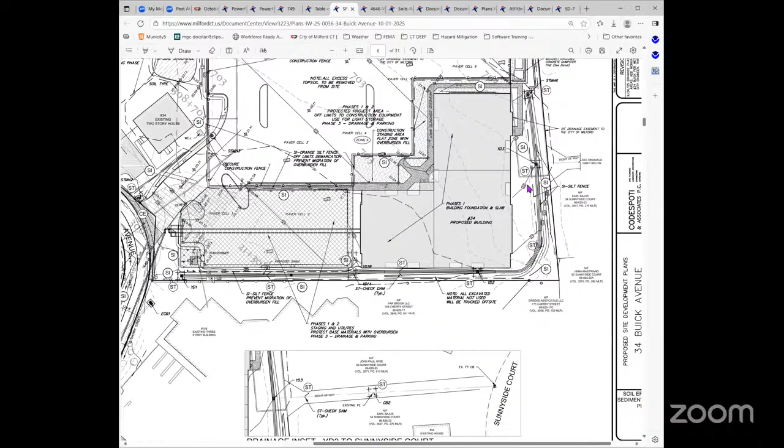And the last item that I'll go over and highlight is the perimeter drainage system for the proposed project. Again, as was mentioned at the previous meeting, there's a watershed area that comes down from Sunnyside Court, as well as some of the adjacent residential properties, which right now discharges through an existing pipe that's located off-site of our property, and that basically all flows onto our property via sheet flow.

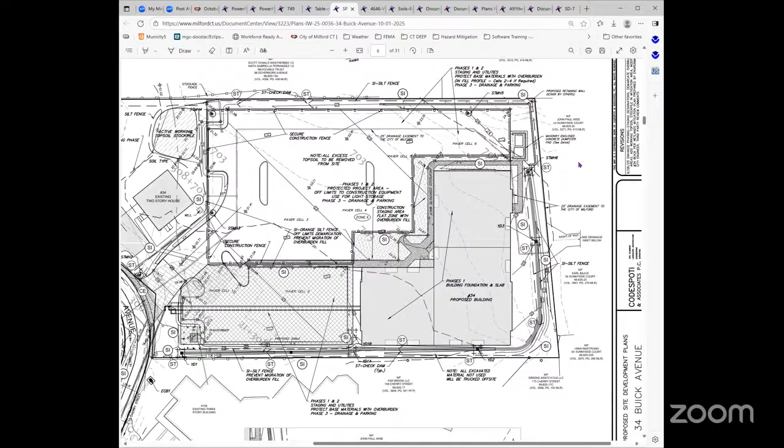And what's on the current set of plans is that piping be extended up into the right-of-way, with a connection being made through a new catch basin, and then extended down to our yard drain 3 on our property, at which point it'll be carried around the perimeter of the property, so that it ultimately gets discharged out to the head wall on Stubby Plain Brook over by the twin 36-inch culverts. Some of the reviewers' comments dealt with the discharge coming out of that piping system, and also the analysis and the sizing of the pipe, which we provided that documentation for, per the reviewers' comments.

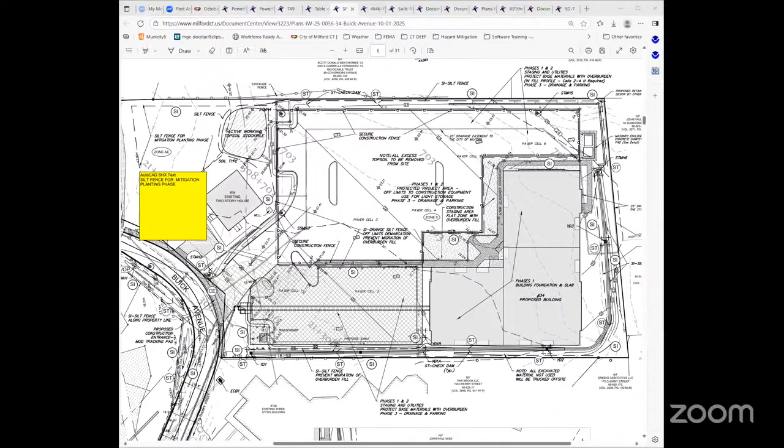So we provided the sizing of the pipes as well as the discharge coming out of the pipe at the head wall. And that analysis indicated that the exit velocities coming out of our pipe will be less than 2.5 feet per second for a 10-year discharge through that system. Based upon the 2.5 feet per second, those would be considered non-erosive velocities with respect to the existing stream bed channel. By way of reference, the stream bed channel is comprised of an extremely compact fine gravel substrate populated with cobbles. With this type of surface, the maximum non-erosive velocity is estimated to be approximately 5.5 feet per second. So our discharge will be well below that.

And also by way of reference, the existing twin 36-inch culverts have a discharge of approximately 160 cubic feet per second, as reported by FEMA for a 10-year flood event. And based upon visual observation, I'm sure the commission members can remember from the site walk, there are no visible signs of erosion or scour taking place on the downhill side of the outlet. So it's my opinion that the proposed outlet through the head wall will not create any negative impacts to the water course in that particular location. So that pretty much sums it up.

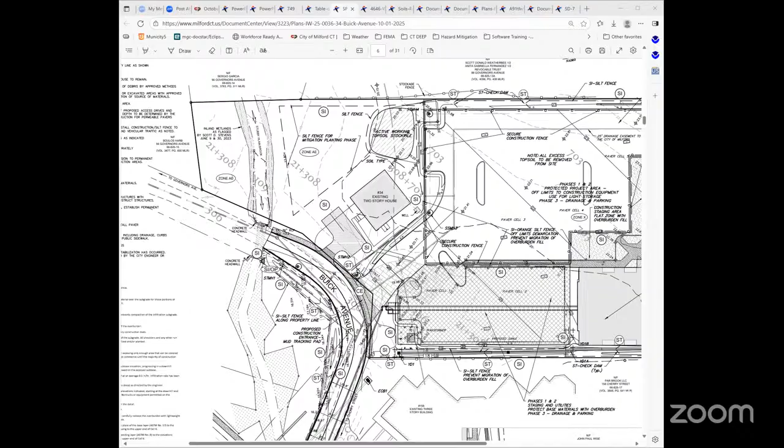So unless the commission has any questions, I'd like to turn it over to Mr. Jeff Gordon to further discuss the modifications to the soil erosion control plan in the biofiltration areas, and then that'll be followed by Matt Popp and Jen Beno to provide their environmental assessments for the biofiltration area. Thanks, Mr. Weiwei. Go ahead, Mr. Gordon. Thank you very much. Again, my name is Jeff Gordon. I'm a principal with Codespoti and Associates, working with Bob Weiwei and the rest of our design team on site planning and the S&E measures for this particular development.

I happen to be one of the charter members of the International Erosion Control Association and have taken post-graduate work in bioengineering for S&E measures. And this is what really the 2024 updated S&E guidelines for the state of Connecticut is advising us to do. They're dovetailing this with the new stormwater management manual from 2024.

And previously there were hopes that we would integrate low impact development features into design. And now the guidance is that it really is a must do. We don't want to develop with a one type fits all type of development, but they want LID measures to be the primary focus in planning and design. And again, it ties in with the stormwater management regulations that were updated with more current data. And that translates into some of the features that we have to look at.

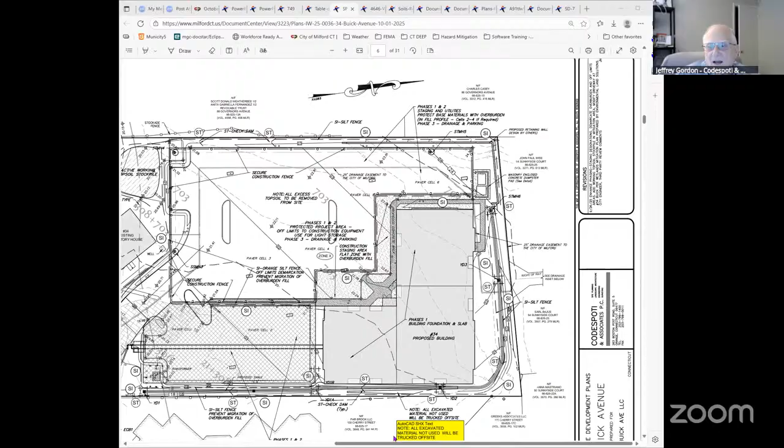But we have a number of phases that talk about the access to the site, the demolition, where we're going to be placing and how we're going to be placing overburden to protect against compaction, areas that are going to be primary access areas for heavy equipment. And then we have that vacant area above there, Mary Rose, that's going to be for very, very light access, light storage. And then right in front of the building there, we have about a 15 to 20 foot, go up a little bit more, and in the crook of the elbow, right there and up, areas for access for the high-low equipment and some construction equipment as well. So we have those things brought out in the phasing plan, which is on the plan.

And then we also have a specific sequence of construction for the permeable pavers themselves, how those areas are going to be identified and protected, and the sequence in which the cells are going to be constructed. The north finger of that parking area there near the dumpster, that area is actually in a cut situation. So the overburden is not really required in that area.

But as we go to the south, that's where we're starting to be into the area where we're going to certainly have special protection of the soils. The access to the site comes off of Buck Avenue, right in the crook of the elbow there, and then kind of like a hard right into that area. And that area is going to be the area where most heavy equipment will access the site.

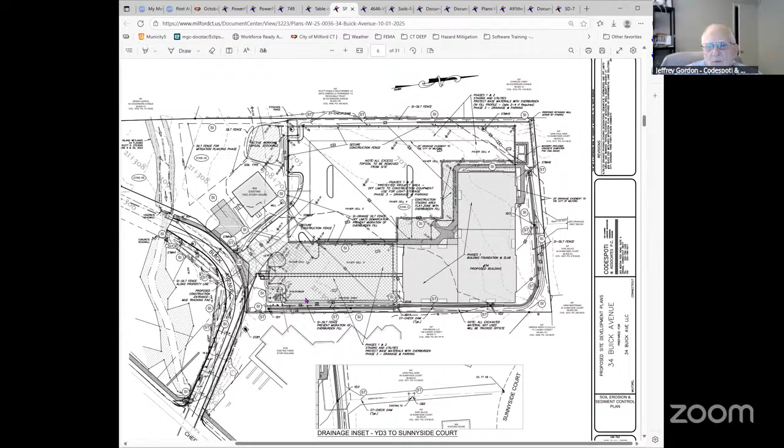Now, if we have an opportunity, I don't know, Mary Rose, if you can bring up the biofiltration plan. Can you tell me which sheet that's on, Jeff? Oh boy, it was added late, or you can blow up that one over there. Okay. Mary Rose, it should be the last sheet. It's SP10. Okay. Thank you.

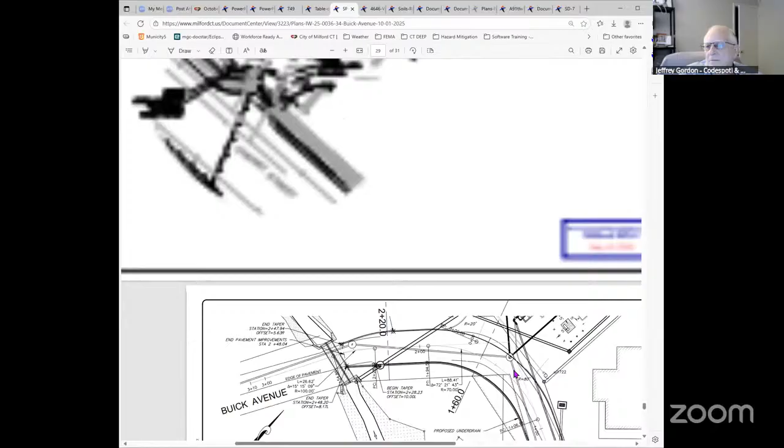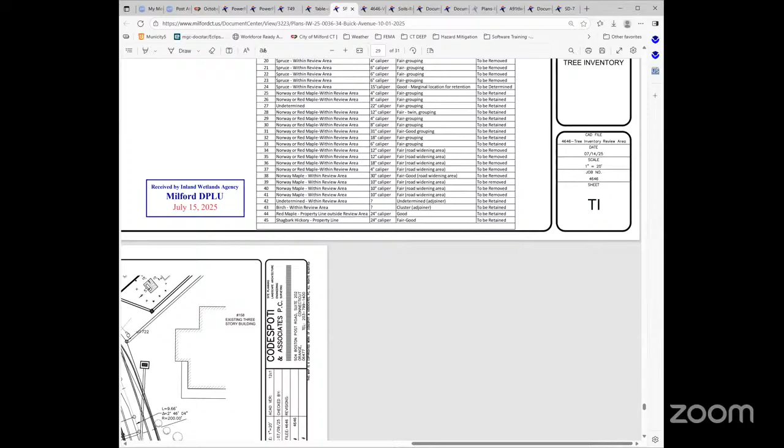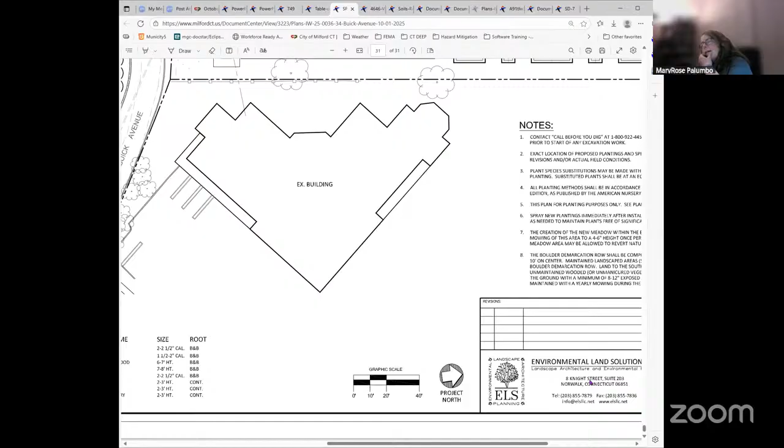What happens? Oops. That's the tree inventory. Oh, tree inventory. What is this? Oh my gosh. Okay. Anyway, so it's about. Sarah, I'm going to mute you. That could be, am I close? Well, that's Matt's plan. He'll be speaking to that. Keep going. Is that the last one in your group? That's the last sheet in the set. Okay, well, why don't you go over just to the landscaping plan and we'll just highlight that one area. Keep going up.

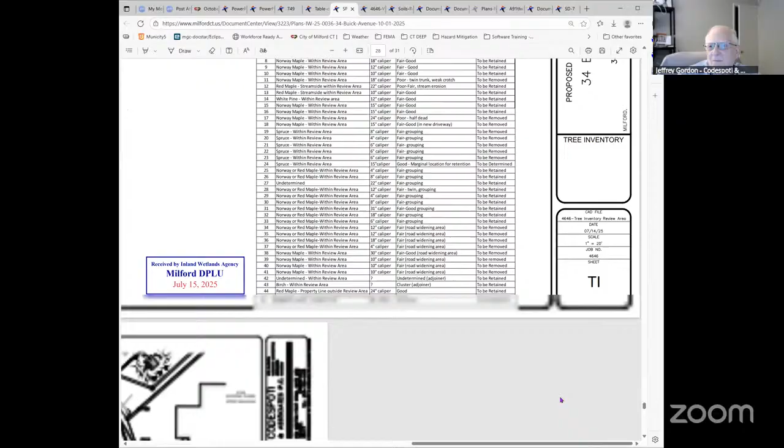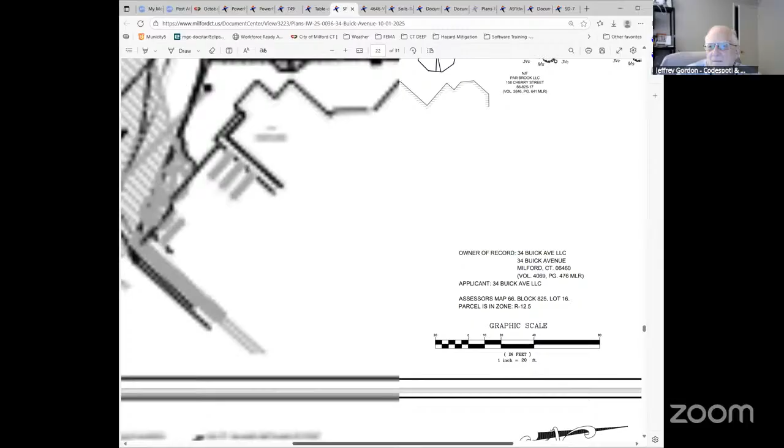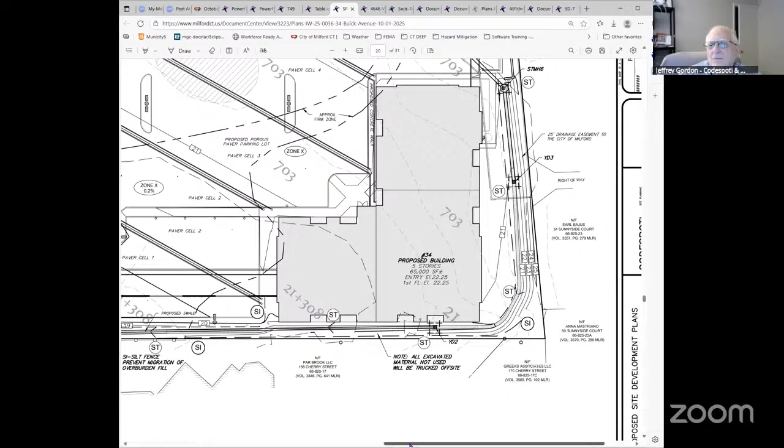Okay. Well, that's good. It's pretty. I'm not sure that has that in this particular. I know that it has the level of detail you want. No, it was the regular planting plan. Let's go back up with another sheet. There you go. This will be good. Well, maybe not. I thought I saw it earlier. No? It's funny, you had it up there before. Mary Rose, I believe it's on page 13. Thank you. Oh, too far down. That's my bad. Oh, well, apparently Zoom did not like that. Hold on a second. You fell off the earth. Got a very angry little guy.

Well, just the comment on the plant materials there, we have introduced the iris, the ferns, spice bush, black gum, arrowwood, all native plant materials in order to create a naturalized depressed area, as was highlighted in the 2024 S&E plan. So we've basically done many of the different components. We've added them together: biofiltration, permeable pavement, vegetated swales. There you go. That's great.

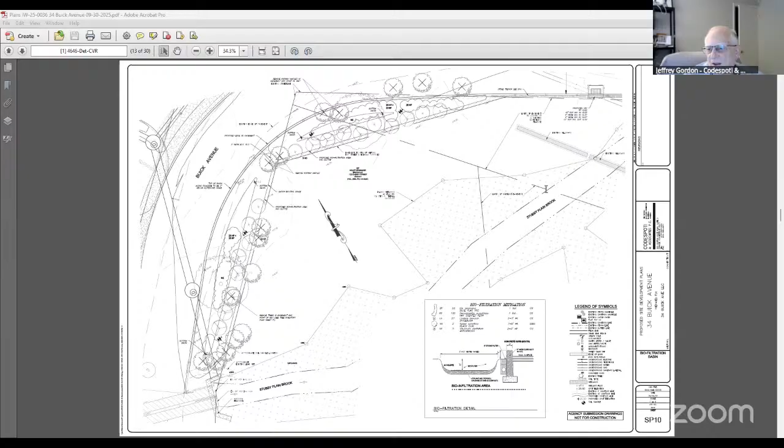Yeah. So this is the area that is south of the slotted curbs that Bob was talking about, that Mr. Podlisky had requested. And these are little basins there that one can leak into the other and can be used to form a treatment. And we have the detail there in the lower right, that biofiltration detail with the plantings. And you can see there's the slotted drain, drops off. There's an under drain behind that curb. And then we have about a 12-inch deep biofilter area that has a special plant medium that these shrubs and grasses will be planted in.

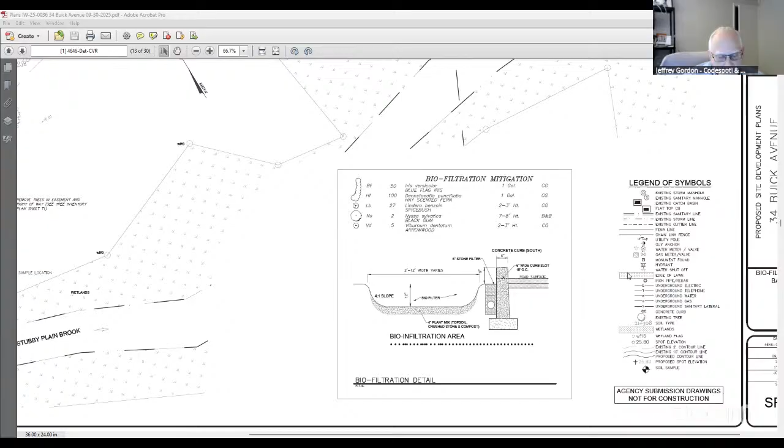So that would really cover the area that I was going to talk about, but I guess Jenn Beno would next comment a little bit more about the impacts on wetlands and biofiltration. Thank you, Mr. Gordon. Go ahead, Ms. Beno. Good evening. For the record, I'm Jenn Beno, biologist, wetland scientist with Soil Science and Environmental Services. Our office is in Rocky Hill, Connecticut, and I've been with the firm since 1994. And I'm co-owner of the company.

So I'm just going to give you a little information on that bioswale area that they're proposing south of Buck Avenue. So currently there are no stormwater runoff management or treatment measures on Buck Avenue. And water just flows untreated into Stubby Plain Brook. And you could see it was evident on one of our recent inspections last week. We were out there, and it's like a wash area, where you could see stormwater just ran off the road and into Stubby Plain Brook.

So the applicant is proposing a small bioswale, and that's south of the road. And so they would create a swale in that area, and then they would provide a good growing medium, and then provide native plantings. And there are actually a couple of benefits. First, you get the stormwater treatment before it enters Stubby Plain Brook, and you're also removing invasive species. So there are several Norway maples in that area that will be removed.

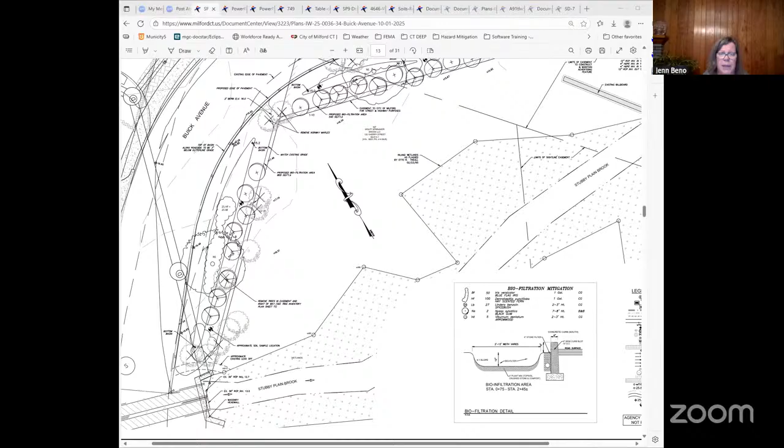So in our opinion, the bioswale, though it might look really small, we think that something is better than nothing in that area, and some sort of stormwater treatment is necessary for that Buck Avenue runoff. I think that's pretty much all I had to say on that. So I'll turn it over to Matt Popp, and he can describe the plantings and add any other information.

Good evening, I'm Matthew Popp, landscape architect, professional wetland scientist with Environmental Land Solutions. I prepared one of the mitigation plans and reviewed the project for wetland impacts. I visited the site on August 26th, September 15th, and September 23rd. Maybe we could just keep this drawing up for a second or two. You can see the wetland area borders where Stubby Plain Brook flows through the wetland.

The wetland consists of mainly a lot of fill, a lot of Norway maples. There's multiflora rose, garlic mustard, and those are three non-native invasive species. The brook itself is channelized. There's boulders on the bank that were placed years ago. The bottom of the watercourse consists of stone, chunks of asphalt, concrete, bricks, and masonry blocks. It's extremely compact. I walked through some of the sections of the brook.

So at the last meeting, I think Tom Ryder noted that this type of watercourse is flashy, meaning that after a rain event, water flows through the channel, but then immediately after the rain event, the flow stops, and that's what I found also. Flashy watercourses typically mean an urban setting where water flows on hardscape areas, flows quickly down into the watercourse and off downstream. Flashy watercourses also usually have little green space above it, little infiltration. So there's usually no or very little treatment of runoff.

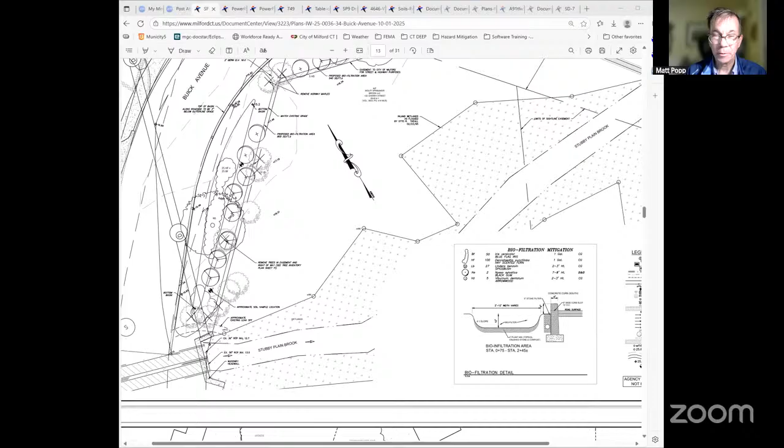So there was no water flowing on August 26th and September 15th. There was a little bit flowing on September 23rd. It was completely dry on those first two visits. There was some talk about benthic organisms within the watercourse at the last meeting. Typically in flashy watercourses that dry out quickly, these organisms are few. They have to be very adaptable and tolerant of harsh conditions, the drying and flooding conditions.

So I went there with a snake hook and turned over a bunch of the rocks within the watercourse, and I found just what I expected, very few organisms. I found about 2 earthworms, a couple of centipedes, and about 20 pill bugs. I looked for a while too. But the bottom is, again, extremely compact. Some areas almost felt like concrete, especially in the section that we're looking at, just below the head wall there.

Regarding the placement of the 24-inch drainage pipe into the head wall, in my opinion, that won't have a significant adverse impact to the wetland or to the watercourse. Again, that section of the brook is extremely compact. When water flows out of that, there'll be a lot of water flowing through that channel to begin with.

So as Bob noted, I'd just like to point out one thing about the drainage system. He went into quite a bit of detail on the permeable pavers. That is 90 feet away from the wetland at its closest point and 110 feet from the watercourse. So that's a significant distance. Just for comparison, the parking lot just to the north of the site is about 40 feet from the wetland.

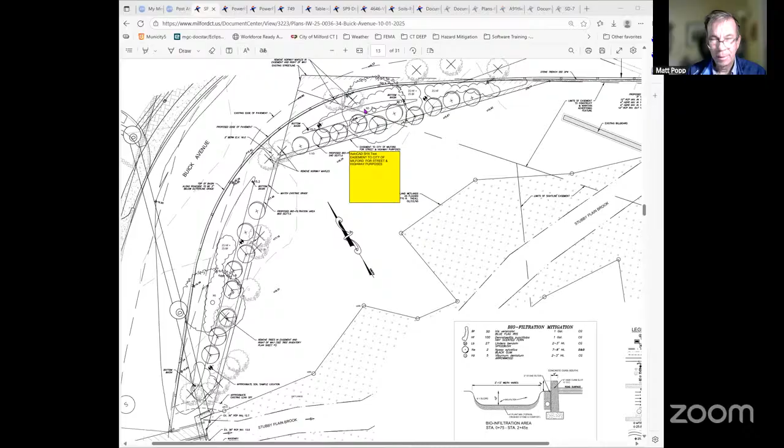But maybe we can go to my mitigation plan. So you can see the distance. We have about 90 feet from the edge of our pavement, from the permeable pavers right there, to the wetland at its closest point, and about 110 feet to the watercourse. As Bob noted, the permeable pavers will infiltrate stormwater runoff. It traps a lot of sediments that collect the pollutants and recharges groundwater, which I think is a good thing here. It makes the flow in Stubby Plain Brook longer, so it's less flashy, which is something that you strive for. So to me, there would be no adverse impact on water quality from the site, permeable pavers or drainage system.

Jeff Gordon went over the proposed biofilter, which is just on the south side of Buck Ave. We shifted Buck Ave a little bit to the north so we can get that in. There'll be a few Norway maples, and I think there might be one red maple that come out. We are replanting that with additional shade trees, mainly the black gum, and then putting in iris and ferns, dry tolerant plants. So that will help cleanse the water from Buck Ave.

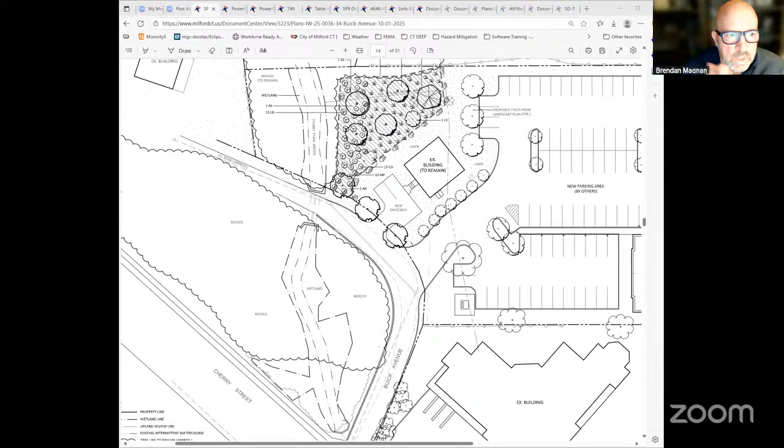Thank you, Mr. Popp. You're welcome. We may have questions. We're going to proceed with opening up for public testimony. And before we transition to that, just as a reminder, this is a continuation of the public hearing. No need to repeat what you've already stated on the record. That's already part of our deliberation. Please, if you have something to address, speak to only new information that's been given.

And please also consider the fact that we have our third-party expert that will be presenting to the agency after the public hearing. And after that, the agency will decide whether the information that we have before us is complete, and if so, whether or not we will continue the public hearing or otherwise. So, Mary Rose, did you have a list of folks that previously identified themselves as wishing to speak in opposition? I do. Just 1 second.

Mr. Chairman, you have Bill Silver, then Willis Morris, then Baluis Harb, who will be speaking on behalf of himself and his spouse, Salumi Harb. And if everybody could raise their hand after we get through those first folks that were pre-registered. Mr. Silver, you have the floor.

Very good. Hopefully you can hear me, and thank you for your work again and your diligence. Certainly there is a lot of information that has been delivered in the last 3 days. And to make the point of that, some of this information was delivered at 3 o'clock this afternoon and at 8 a.m. this morning, and I'm retired and I haven't been able to go through all of it yet, so I'm impressed if all of you have.

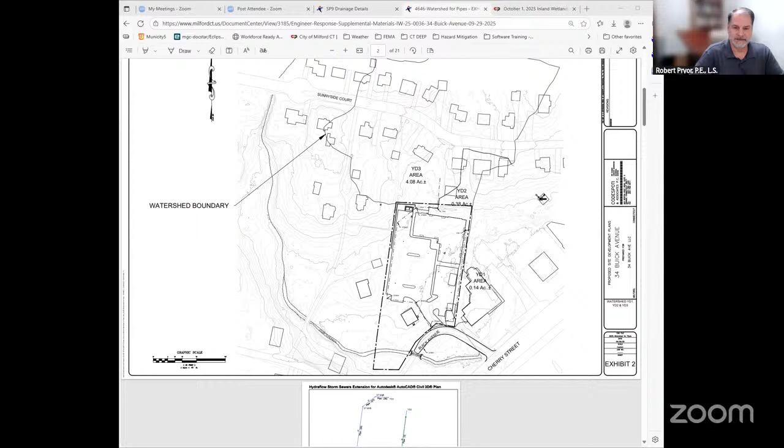So again, summarizing as far as the engineering comments, it feels like our initial comments have been addressed. And should a review of the plans confirm that they've done everything that they've said they've done in their response letter, I believe that my engineering comments will have been adequately addressed.

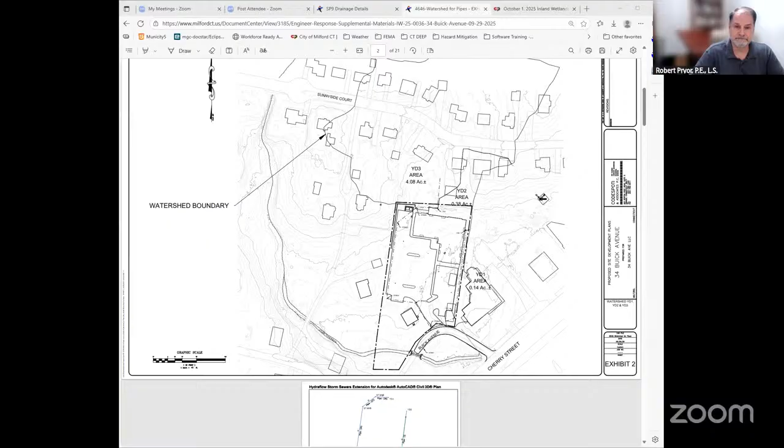And I think with that, if you have any specific questions, I'm happy to answer, or we can wait till after Tom does his portion of his review. But I'm certainly willing to answer any specific questions. And if there's something that you feel we really need to look at further, any specific items, we're happy to do that. Thank you, Mr. Pryor. Yeah, let's proceed to Mr. Tom Ryder's comments, and then we may have some follow-up questions for you.

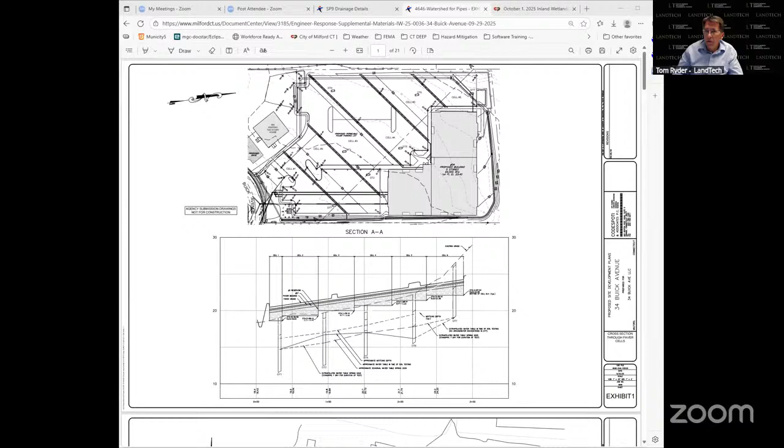Good evening. My name is Tom Ryder. I'm a senior ecologist here with LandTech. I have visited the sites. I walked the sites and looked at the natural communities out there, reviewed all of the reports, and as Rob said, we have provided initial comments that we thought would improve the watercourse, the wetland, and also, very important, the buffer. We had made some recommendations about moving the road slightly to the north and allowing for some treatments off of Buck Avenue.

And as you have seen, although it did come in fairly late, and I don't know if you've all digested it, we have talked about it tonight, the bioswale. So as an introduction, what I'm saying is that we have made a number of suggestions. And on the environmental side, as with the engineering side, they have taken them seriously and taken them to heart, and have incorporated our recommendations into the plans.

Going over some of the comments that we had, excuse me. The issues that we had originally were from the functions of the wetland, to make sure they're protected. And I think with the addition of the bioswale, which is on SP10 of the new plans, I think that's an excellent location for it. I think it will work well.

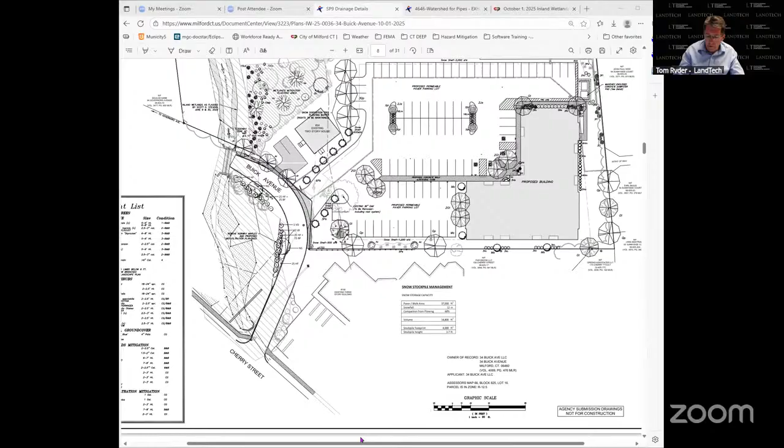I think the bioswale is designed, it shows adequate growth and infiltration media, which consists of topsoil, crushed stone, and compost. The plants that they have selected are appropriate for the area. The only question I had on the bioswale is that they show soil profiles, locations of soil profiles, A, B, C, and D, but I did not see any of the data on that.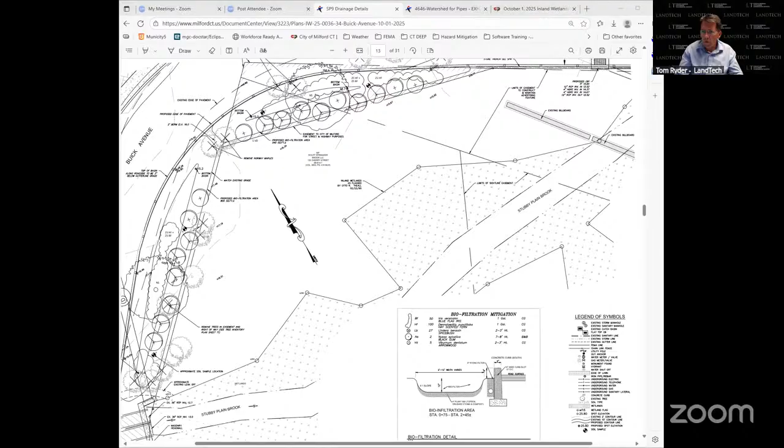So maybe the applicant can provide some of that information just to support the depths of the medium that they've designed. But I think that's a major improvement over the original plans, and I think it'll work well in that area.

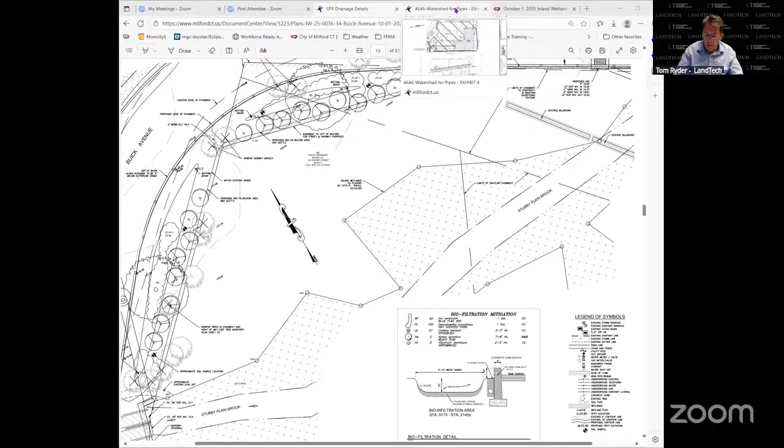Also, there's a separate mitigation plan called LP1, prepared by Environmental Land Solutions. That offers an improved wetland buffer over what's existing today. It provides enhanced infiltration and nutrient uptake functions in the buffer, therefore improving the water that sheet flows over it into the wetland and eventually into the brook.

I think that is a good location for it. It's what they have control over, and it's well utilized. And the plantings I have reviewed that are shown there are appropriate as well. The only comment I had on that is that they stated they're kind of creating a meadow with a future overstory, and the meadow, as Matt Popp noted in his report, can either be left to natural succession or it can be mowed once a year.

And in the text of the letter, he had put it in there during the winter months. He probably meant late fall. That's typically when these are mowed, late October, November timeframe. It's after all the birds have left, all the wildlife is gone. The vegetation is working its way into senescence, and you can do a good mowing on that.

And the reason for the mowing is to actually rejuvenate, in many cases, the regrowth of the herbaceous vegetation, and it also keeps out some of the woody vegetation if that's what they're intending to do. But in general, I think that's a very good addition to it.

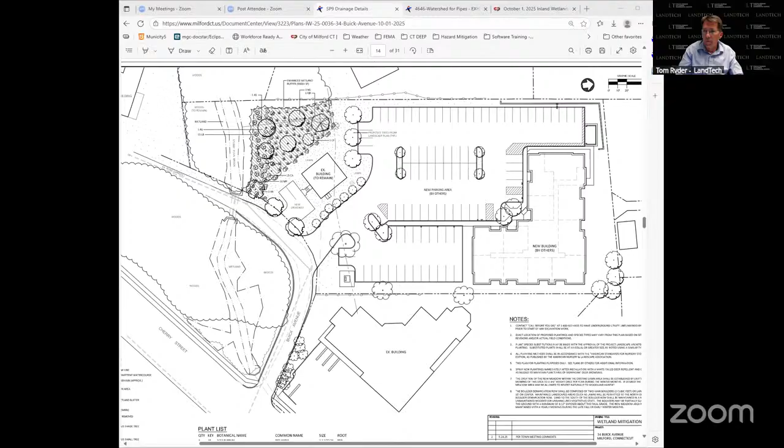My focus is a little more specific than the engineering. The engineering covered a lot of it. I had a lot of comments on those as well, but a lot of those comments were already incorporated into the engineering comments. So with that, my comments have been stated, and I'm here for any questions. Great, thank you, Mr. Ryder.

So my question to both Mr. Pryor and to Mr. Ryder is, in light of the concerns that were raised by a few of the citizens in opposition this evening, and in light of the fact that we've all received this information, I would ask that you take the time to consider and contemplate the concerns that were identified and help us in the agency ensure that those concerns are addressed.

And I'm going to broaden my request to the applicant team. So, Mr. Crusaden, there were some pretty serious concerns raised by Mr. Silver, for example, and some others that I would like to suggest that the agency keep the public hearing open just for those concerns and give everyone the opportunity to intentionally respond to those, not respond in the moment, but continue the hearing for one more special meeting to address those. Sure. That would be my suggestion. Yeah, absolutely, Mr. Chairman.

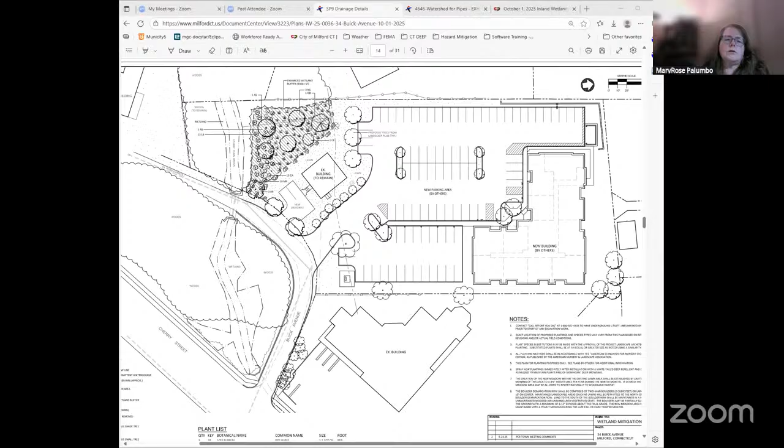Yeah, and I think we are getting close to the end of the statutory allowance for the duration of the amount of time the agency can hold a public hearing open. So, Mary Rose, can you remind me? I think it's the 24th of October. Is that right? Oh, you're on mute, Mary Rose. Thank you, Mr. Chairman. The terminal date for this application is 10/24/25. Once the hearing is closed, we'll have another 35 days to review it, but the hearing must be closed by Friday, October 24th.

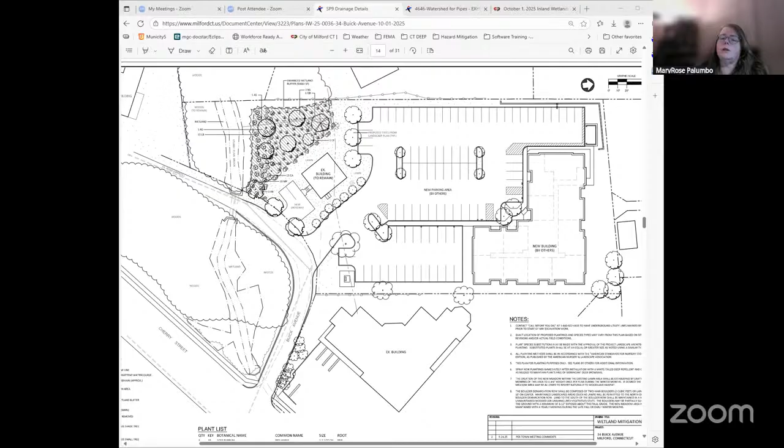We have one meeting between now and then scheduled. That would be on Wednesday, October 15th. I don't know if it's the agency's pleasure to have another meeting intermediate to that. I do know the applicant team will not be available on Wednesday, the 22nd. I don't know if answers could be had within the next week, or if we can get a quorum together next week to have a special meeting. I'm not sure what the agency's pleasure is on that.

Okay, thanks. Let me open it up to the agency. Let me not assume, but I am going to lead us off with saying I think we have a lot of information to review. There's a lot of new information as has already been acknowledged. And as I suggested, there's a few concerns that were raised this evening that need to be addressed. So is the preference to address those and continue the public hearing on the 15th, which is at our next regular meeting? Or is there a preference to have a special meeting to attend to this matter? Open it up to anyone.

Mr. Black. Through you, Mr. Chair, I think waiting to the 15th would be wise to give everybody enough time to take in all the information and be able to respond properly. I don't think we should rush this and make sure we have all the information out for the agency. Okay, I like that idea. Good rationale. Any other thoughts? Mr. Gradwell?

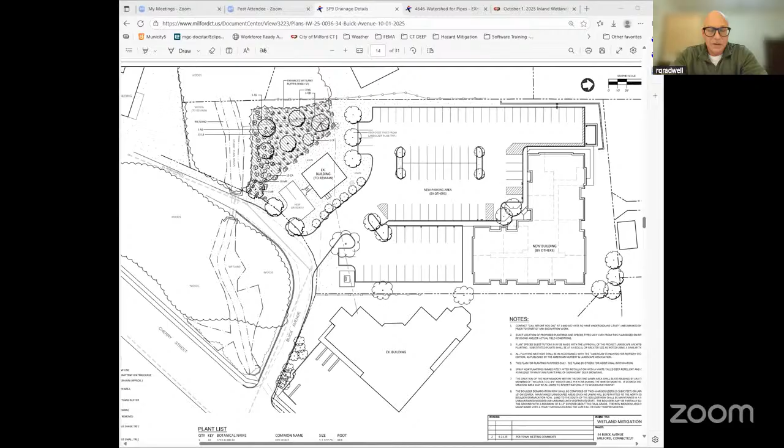Through you, Mr. Chair, I second what Mr. Black had said; the 15th sounds like a decent time frame to allow us, the commission, to get into the application material that we just got today and shortly thereafter. I'd like to hopefully state that we won't see any new information on the 14th or the 15th. We won't see a package of plans on the 15th that we need to dig into again. That's what I would like to see. But that's the applicant and the review team's wishes as well, hopefully.

Mr. Crusaden, is that your expectation as well? That there will be no new information on the 15th? Yeah, Mr. Chairman, my only concern is if we wait till the 15th... I guess my first question, I apologize, back to you, is the reasons it would be left open. If it's very specific things, I think the 15th would work. If it's more,

if there's more potential for things to be brought into the record, either by neighbors or in opposition, that would require more answers, the 15th might not be sufficient. It might be too late to get that information together. I guess it depends on if there's a timeline for receipt of information by the agency and what it is being left open for. The 15th could possibly work depending on what those parameters are.

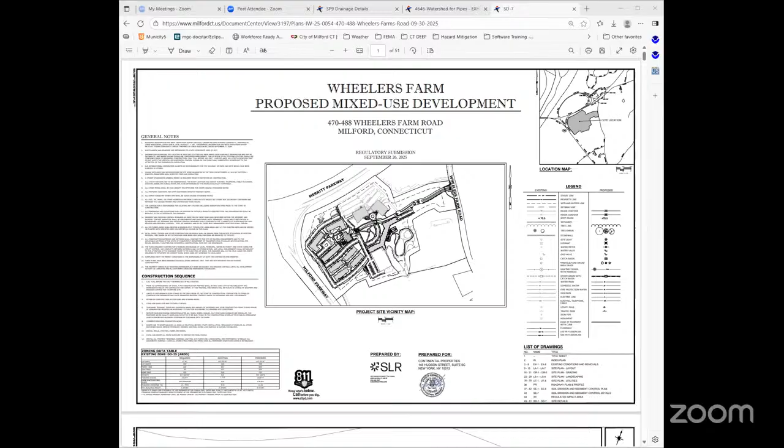Also, the engineer is going to need some time to develop his comments. I'd prefer to come back before you and have a good, solid presentation addressing all the comments coming in from staff, engineering, from wetlands and otherwise, so that we're comprehensive and complete when we do the presentation. So November 5th would be fine with us from that perspective. Once again, I leave it to you, Mr. Chairman, what works best for the Commission, but we have no objections to that.

Okay, great. Thanks, Mr. O'Leary. That makes good sense. We like complete applications that are thoughtful and well prepared. So that makes sense, and just don't want to be holding you up. So, okay. Moving on.

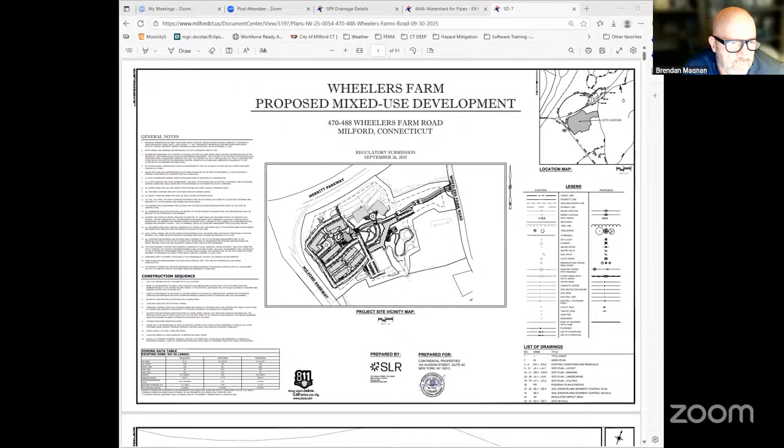I believe consideration for the minutes from the prior meeting. So minutes from September 7th. I'm sorry. Yes. September 17th. Do we have a motion to accept those as presented? I can make that. Okay. Do we have a second on the motion? I'll second that. Great. And let me just look for a second. Okay. Roll call vote. Roll call vote, Lisa.

Daniel Bediger, Aye. Ranjit Bahav, Aye. Brian Black, Aye. Jim Connors, Aye. Julie Valvo, Aye. Ray Gradwell, Aye. Brendan Magnan. I'm going to abstain. That's why I was pausing, because I was validating that I was not present. Okay, motion does pass. Thank you.

Mary Rose, is there anything you need to highlight on the staff report? I finally got the agenda downloaded again. On the staff report, a couple of things. New legislation went into effect yesterday that requires inland wetland commissioners to be trained every term or every 4 years. As we have 3-year terms, you're roughly going to be training every 3 years or so. It's the online inland wetlands commissioners training, which is unfortunately a bit long, but all of you have done it once already.